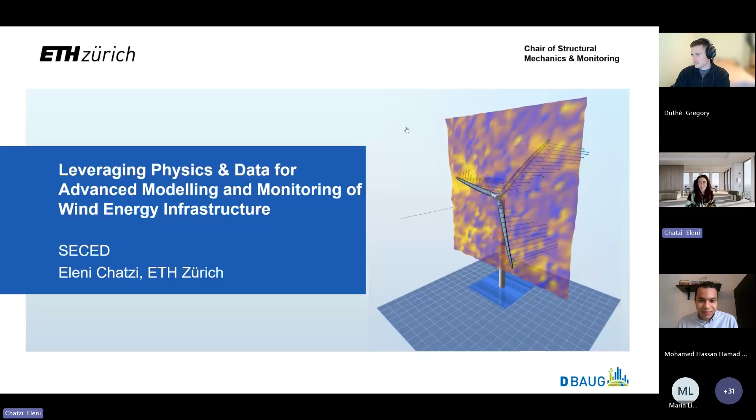I was saying that I very much like the format where you invite the different group members to offer some inputs. And for this, I would like to give an intro that is a bit broader than just wind energy structures. It's about our vision on monitoring and modeling different types of structures and infrastructure systems.

And maybe here to ask you if you can see the entire screen or the presentation mode, because now I don't know which one is shared. We can see the slides, just the presentation.

Good. Okay, great. So let me give you this kind of rough overview without taking too much time, which essentially lies in our view of infrastructures or large safety critical systems as cyber physical entities, which implies entities that integrate within them the aspects of sensing, computation, control, and networking, meaning that we do not just view the physical assets as sensitive structures that are exposed to threats from the environment, but we rather try to elevate these in a sort of hybrid representation, a sort of digital representation that is, however, active in that it offers a two-way communication between the physical asset and the processes and actions that we can, let's say, take upon this asset.

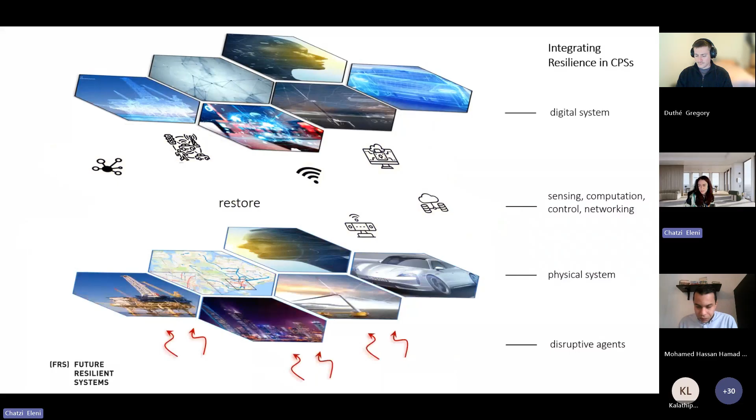So in order to make this kind of link, we rely on data, the availability of data that can be available in different types of forms. And today we know that such data can be extracted with various types of sensing technologies and at various scales, even from large-scale infrastructure systems, especially wind energy structures. And they can be extracted to offer information not only on the response of the system, which is typically what we try to seek through structural monitoring solutions of various types, but also on the loads that are acting upon this system and the environment within which it operates, which of course could be an environment that degrades slowly, something that is obvious with climatic actions, but also could be an environment that rapidly changes in the face of different types of extremes that could actually jeopardize the health and safety of these systems.

And gathering information throughout these operational cycles is very important for us, not only for effectuating different types of triggers for their repair and reaction, but also for modeling how these systems evolve and how we can actually improve them.

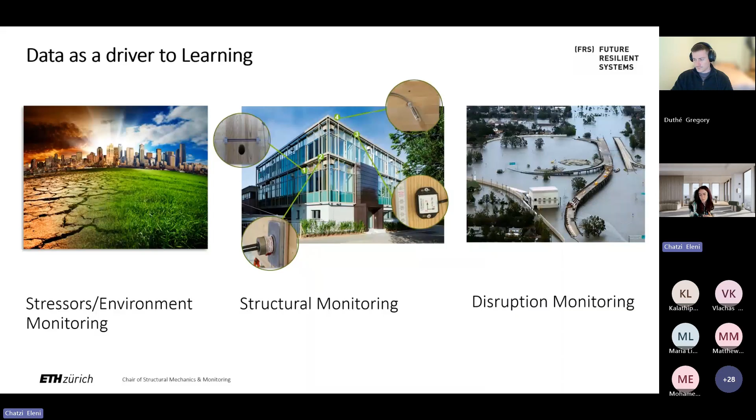And in the chair of structural mechanics and monitoring, we are in the, I guess, lucky position to have experience with different use cases, a bit beyond the domain of wind. Actually, wind is perhaps our largest domain of activities at this point in time. We even own a wind turbine structure not too far away from our lab, which we use as a living lab where we experiment with different types of sensing technologies and algorithms for structural monitoring.

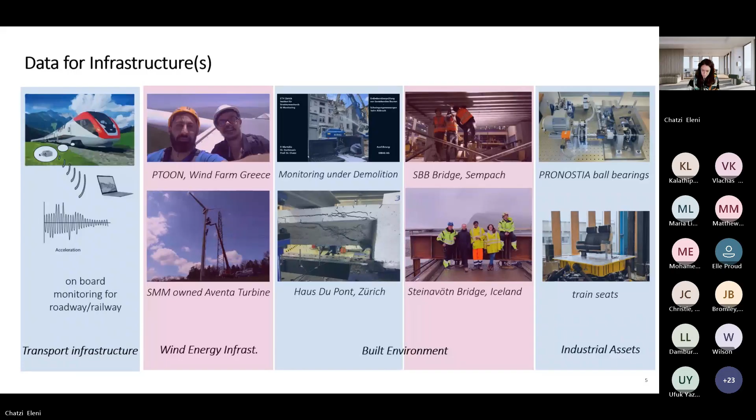But we're also lucky enough to gather experience from other systems, including railway monitoring, more conventional civil infrastructure, and even industrial assets. I say this because the methods that we use are actually inspired from problems and issues that are met throughout these systems. And it's interesting to note that some of the sensing technologies are also applicable more broadly.

But maybe to frame the approach that we follow, it's interesting to say what we can do with data alone. And wind energy infrastructure systems are good in this respect because they are data rich. So in fact, we are in the position to gather SCADA, as we call it, information from every wind turbine within a fleet, which is usually averaged information over 10-minute intervals, but still rather important information about the operational landscape within a farm.

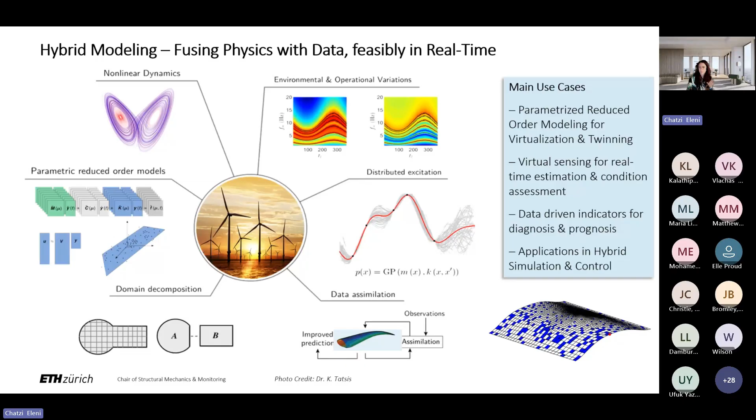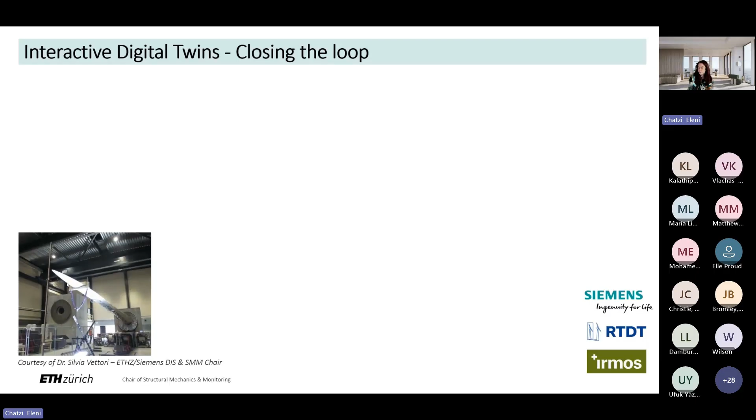I show you here such an application that was quite paramount for us. It comes from a previous PhD student of our group, Dr. Silvia Vettori, who was part of a larger European project, where the task was to try and deliver a digital twin of an actual operating blade. This was actually set up in controlled conditions in the lab, and you see here the blade, which was instrumented over its length with different types of vibration-based sensors, accelerometers and strain gauges, or tilt meters in this case.

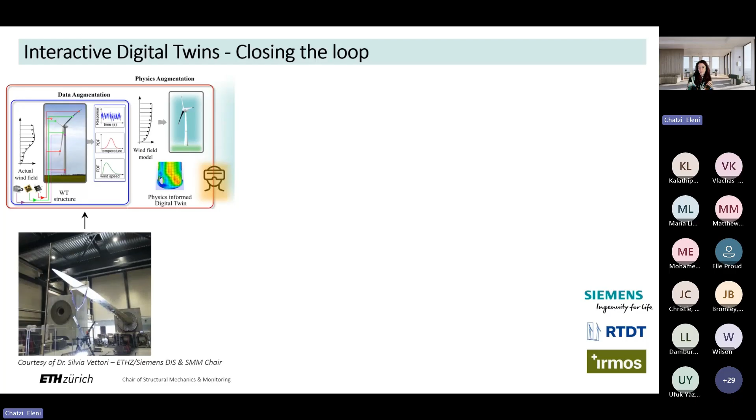And what Silvia did was to implement the logic that I described and that lies at the core of our strategy, which is to build a reduced order model based on physics, finite elements in this case, and substructuring methods for this blade, and to fuse it with the data that was drawn in real time at high sampling from the accelerometer and strain gauges, and then eventually blend them through a Bayesian logic of a Kalman filter, which operates in real time.

Now, what this outputs for you is actually the full field response of this structural system, the blade in this case. You can actually imagine to plot quantities of interest that include strain and stress throughout the surface of the system as it operates, or as it's being loaded in this case.

And our colleagues at Siemens Industry Software, where Silvia was based and currently still is based at, developed this sort of augmented reality platform that would deliver the output in a form that is easy for the engineers to interpret, not only for the obvious task, which is diagnostics, something going wrong with the system, but more importantly, once you have such a calibrated model, for forecasting tasks. So what happens when you have new and increased loads, for example, and how do we assess the reliability and robustness of the system under these loads?

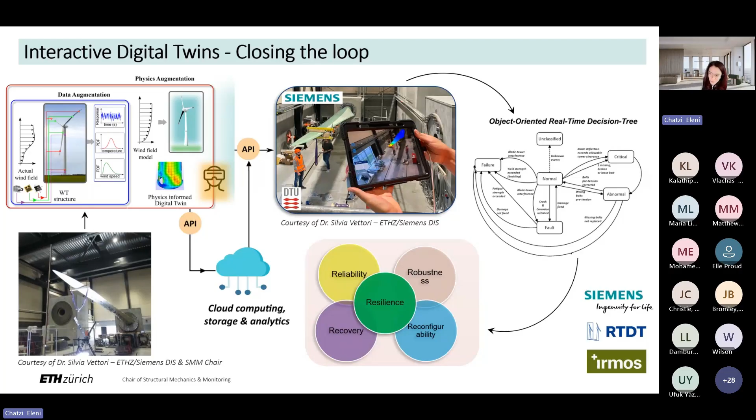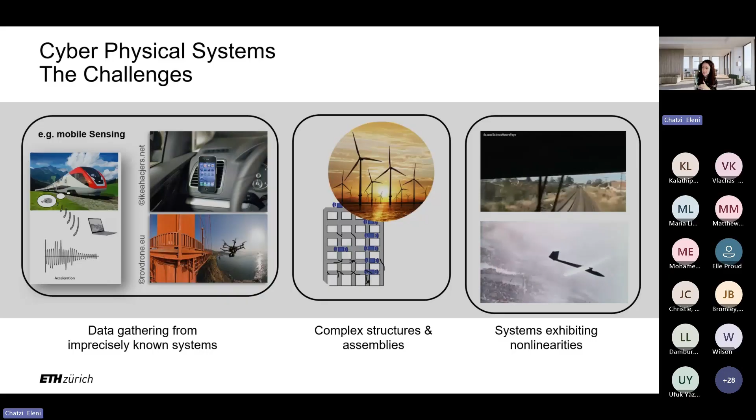This is actually what is underpinning our approach, and there are two spin-offs that actually came from our group that are trying to implement these concepts with RTDT implementing them in wind energy structures. There's one more thing I want to add, which probably will become apparent in what is presented next, which is what do you do with complex systems? And here our approach is to explain that it is not always enough to claim that we have the amount of physics at hand that is sufficient to describe the system.

Rather, we try to approach the problem as a two-axis problem where physics, on the one hand, represents how much knowledge or confidence we have in the first principles that underlie the problem, and then the data axis shows how much data is available. And there's a different scaling that you can do. And in a recent paper, we explain how different methods can be used in what we call this physics enhanced spectrum, to fuse physics and data at different weights.

A number of these methods exist, and as part of the group, we have been developing different subcategories of schemes that you can imagine can be used to fuse dynamics equations, for the most part, with a flow of data that is usually vibration-based data, and that can be characterized with different terms depending on how you imagine to fuse the physics into the problem at hand. So I invite you to also look into our further works.

I think this is a good introduction with respect to what you will see described next from the members of the group. Because I don't want to take much time, I'll just take you to the overall vision that we have, which is to exploit our engineering intuition and knowledge, which is something that we have always been using for what we engineers call design, which is the forward simulation, and now take it into consideration for what we would refer to as the inverse problem, the problem where observations, monitoring data, inspection data become valuable, and where even the knowledge of the expert can be exploited to guide operation, maintenance, and overall management of safety critical assets, and especially wind energy structures.

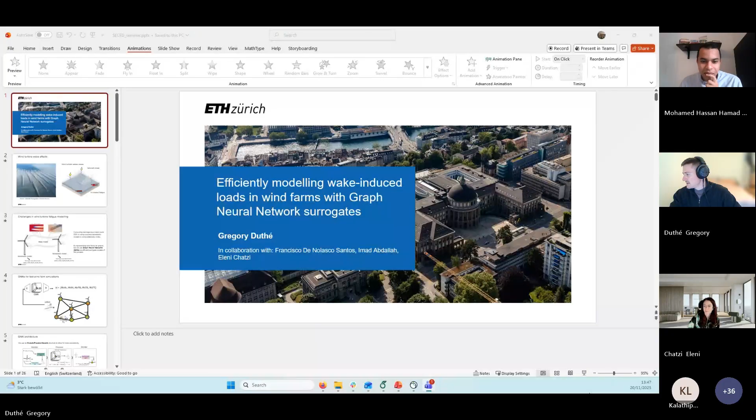I'm a postdoc now in the group working on wind energy in general, but mainly we're using geometric deep learning. And the work I'll be presenting here is some of the work I did during my PhD, which is about efficiently modeling wake-induced loads in wind farms using graph neural network-based surrogates.

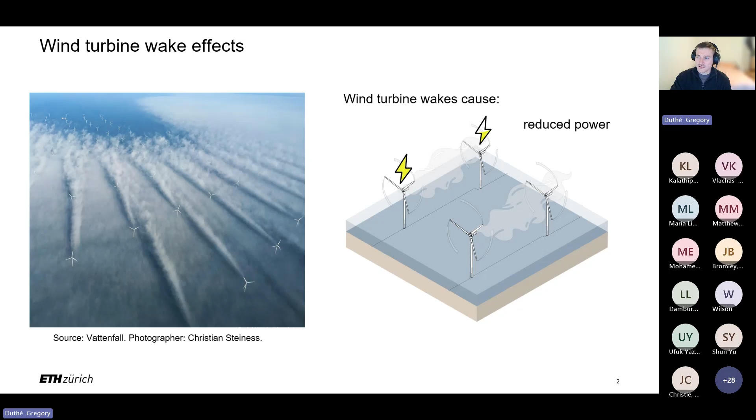So what is the big problem? Well, Eleni already briefly mentioned it. It's these wake effects. Front row turbines cause increased turbulence on the back row turbines, and obviously this comes with a cost. These back row turbines see reduced power, but something even more important and more difficult to model is the increase in fatigue that these back row turbines experience.

And how would one typically model this? It's quite a computationally intensive process where you start with multiple aeroelastic models. Typically in the wind turbine industry, we use OpenFAST, or HAWC2 is another aeroelastic modeling tool. And then we couple these aeroelastic models together using a wake model. Each aeroelastic model will compute the dynamic response of the turbine, and then through the wake model, we have multiple of these aeroelastic models coupled together. This is a computationally expensive process.

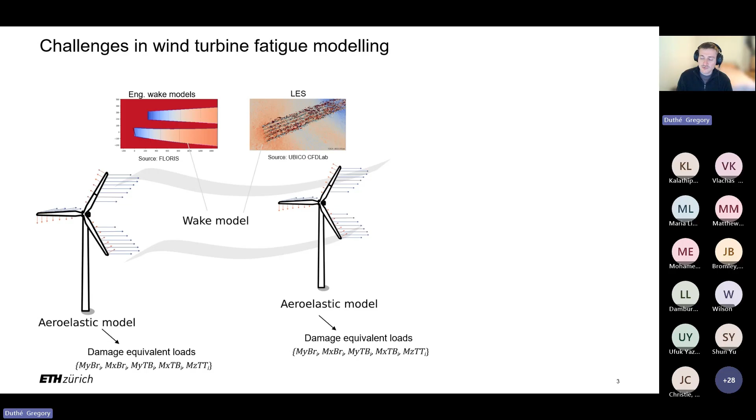From the aeroelastic models, we compute our damage equivalent loads, which are the quantities of interest. And even if we were to use the most simple wake model, such as just using Gaussians, like what is used in FLORIS, or something much more complex like LES, all of this is really expensive. So computing these damage equivalent loads using coupled aeroelastic models is very costly. We want to find an accelerated way to do this, and to do so, we use graph neural networks as an efficient surrogate model.

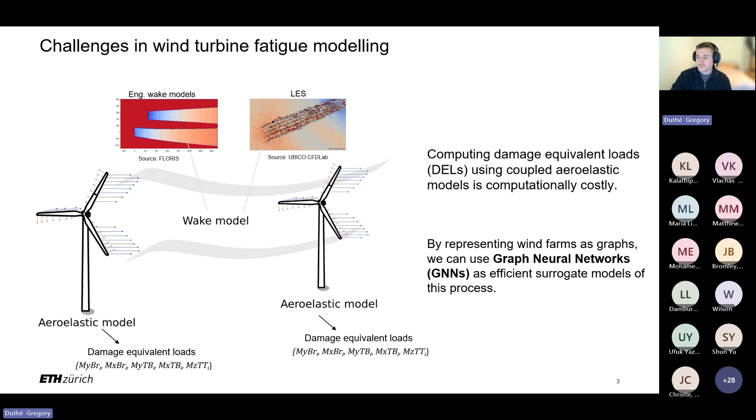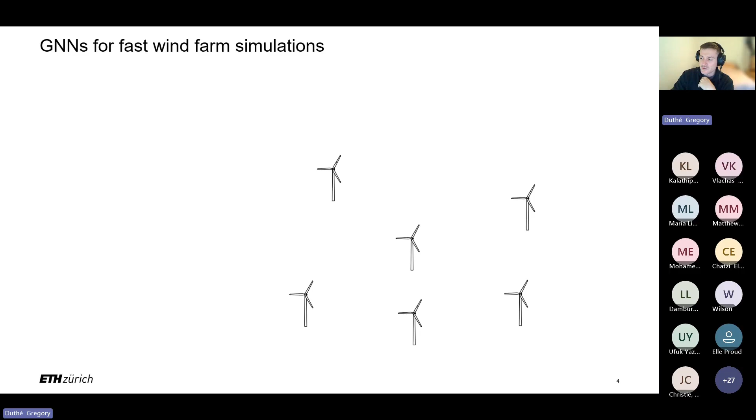So how does this GNN work? We start by taking our wind farm. Our turbines become the nodes of our graph. Once we have the nodes, we then need to connect them together using some kind of connectivity scheme. Often we use something like Delaunay triangulation to avoid having disconnected communities, but we could also go for a fully connected scheme. We then take some geometric properties that we append as edge features. And we have our global inflow condition, which is a graph level attribute as it affects all the turbines in the graph.

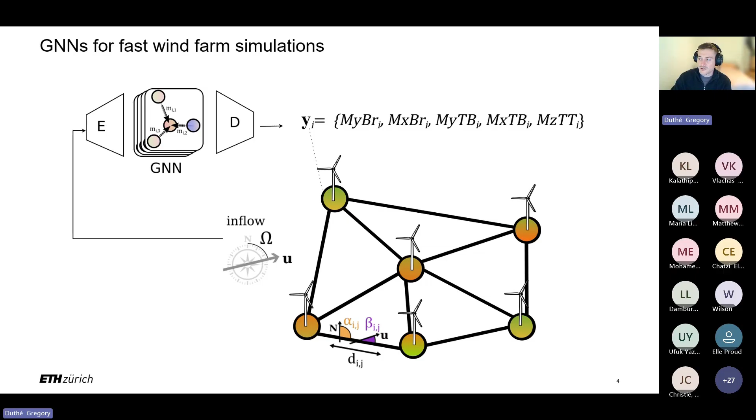We then take this graph with initially empty nodes and the edge features, as well as the global features, and feed them into our encode, process, decode GNN, after which we get updated node features, which are the quantities of interest, in this case, the damage equivalent loads for multiple components at each of the turbines. This encode, process, decode structure is quite typical in GNN applications for physics because it allows for much more expressivity.

The idea is we take the initial features and encode them, or project them, into a high dimensional latent space using simple MLPs. The processor is where the key step of the GNN happens. It's where we have message passing, where we transmit information from one node to the next. We first compute messages for each edge, which is connected by two nodes, and then we aggregate and update the nodes. By doing this iteratively, we can propagate information in our graph. After a sufficient amount of processing steps, we decode back into the physical space using, again, MLPs.

Now, the training strategy we use in this work is to first create a very generalist GNN by pre-training it on thousands of random layouts that we generate using a cheap simulation tool called PyWake. With this generalist GNN, we want to learn the fundamental physics of the problem. Then, if we have access to higher fidelity data, we can adapt and fine-tune this generalist GNN to this higher fidelity data, or for a given layout, using efficient fine-tuning. In this case, we use low-rank adaptation.

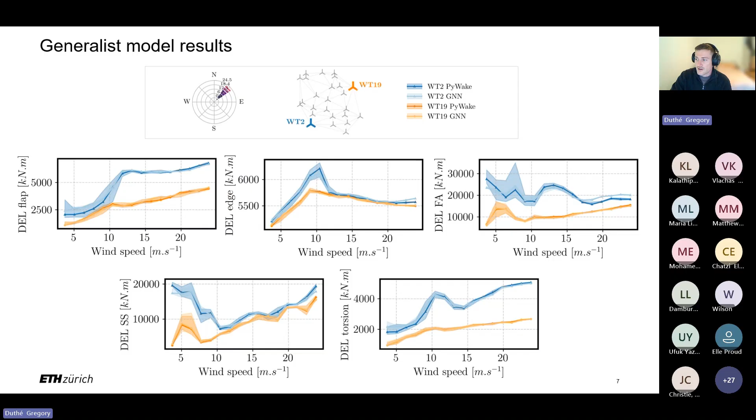The last extension that I briefly want to mention in this work is going in the direction of uncertainty estimation. So we don't want to completely change the model, and we would like to get some estimates of how the model is behaving with regards to uncertainty. So what we use is conformal predictors, where we basically reserve some calibration data to determine guaranteed prediction intervals without strong assumptions on the model.

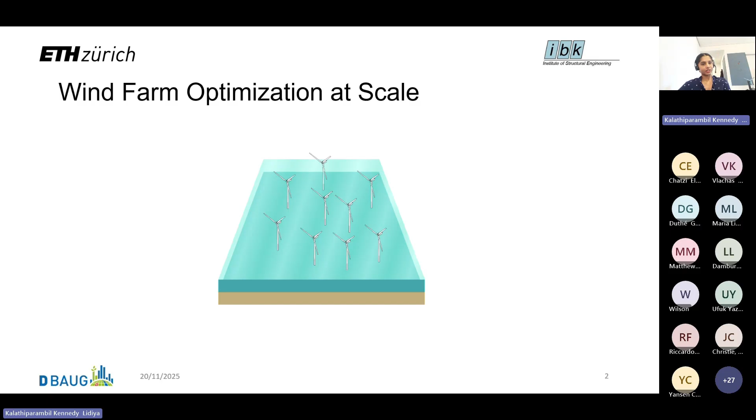So from what Eleni and Greg had already explained, we all now understand these are complex aging infrastructures that are subjected to various physical processes happening at different scales. And this is often not great for the turbine. So in the last few decades of research, there has been an increased attempt to reduce the levelized cost of energy, which was driven by scaling up the size of the turbines. But unfortunately, we have reached a limit in scaling up the size of these turbines.

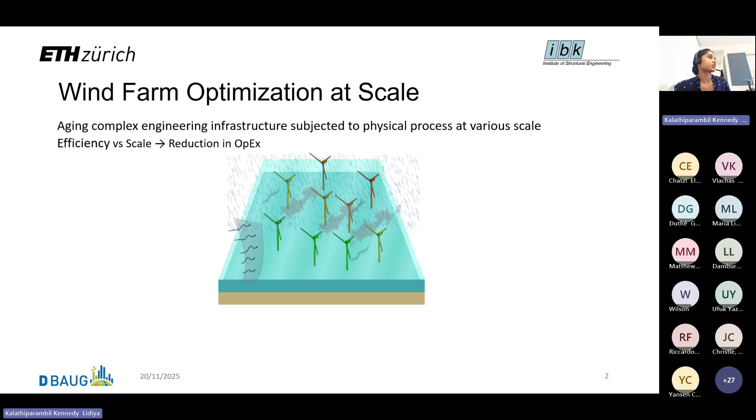So then came the question of efficiency versus scale. So it looks like we could also reduce the levelized cost of energy by making the operations and maintenance much more efficient. But this comes with a lot of challenges. We need to understand the interactions at an entire farm scale, which is very hard to model, as Greg explained.

And the topology becomes much more important, that we need models and computational frameworks that can work across different topologies and different sizes of farms. So this is my main research, where I want to build a computation framework for more generalized

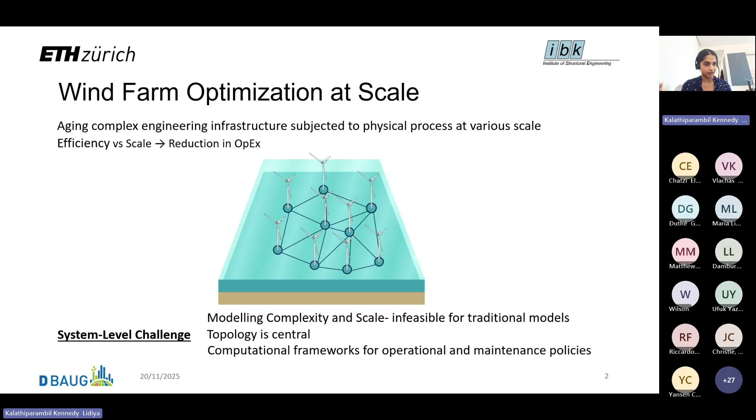support for maintenance decisions. So there are three main research questions that need to be answered to build this computation framework. One is, what is a good model from which we can accurately infer what is happening at farm level, and also it is fast enough that we can make inferences for the reinforcement learning agent to make or suggest actions or policies.

And what is a good generalizable surrogate model for this? So this is what Greg has already explained, and I'm building upon what he has done for farm level modeling. And how can we best make use of the expert knowledge or domain knowledge that has been accumulated over years to make the reinforcement learning agents make better policies or decisions, or suggest better policies or decisions?

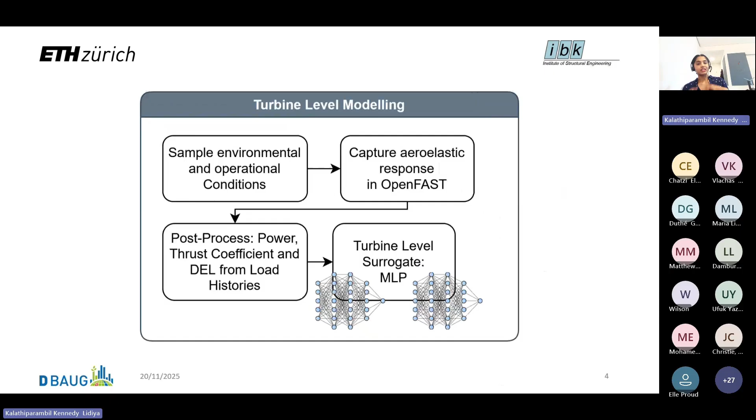So this is the entire framework I'm trying to build. This looks a bit complicated at once, but I will walk through one by one. So first, we need to understand the turbine level physics, what is happening at the turbine level. So we have these aeroelastic models using OpenFAST, where we sample different inflow conditions and understand the response of the turbine. And from the load histories, we can understand what is the load on each turbine.

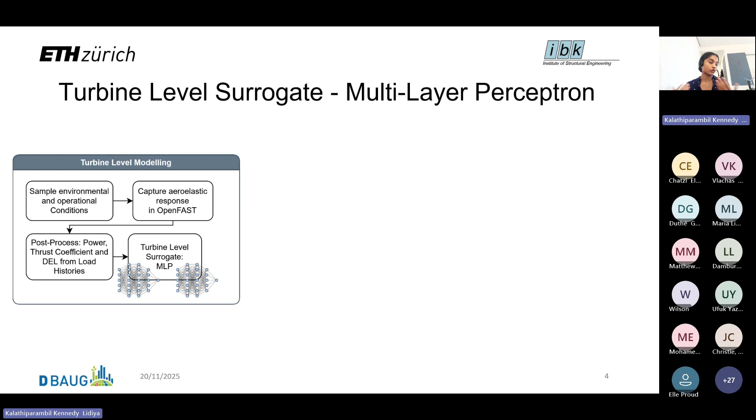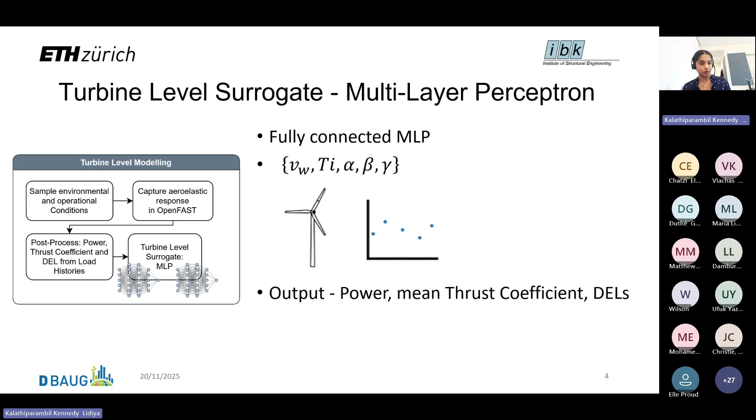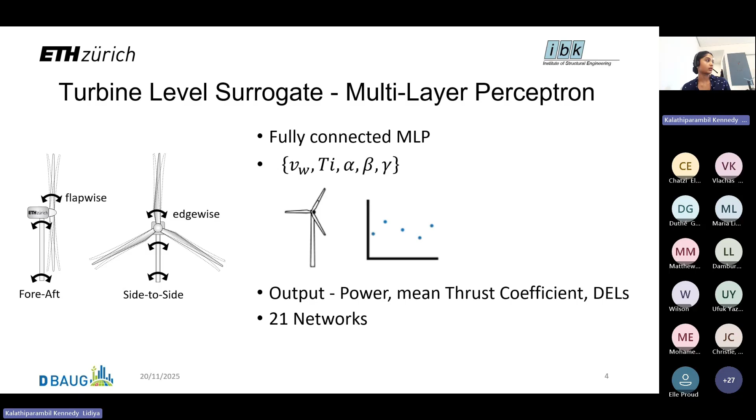And such generated data set is used to train a surrogate, normal multi-layer perceptrons, to give quantities of interest, in our case power, thrust coefficient, and damage equivalent loads at different components, where currently we are focusing on blade flap-wise, edge-wise, tower bottom side-to-side, tower bottom fore-aft, and also tower top yaw.

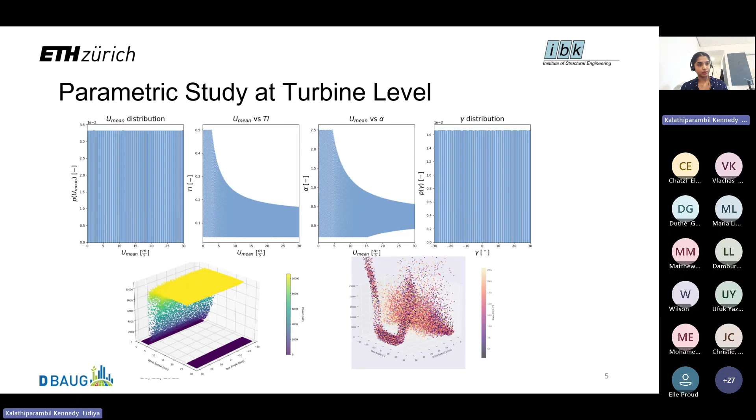So this is how the inflow conditions were sampled. It is based on some literature, and you can see we could simulate around 65,000 different cases, and the surrogate model for predicting load and power was built based on this.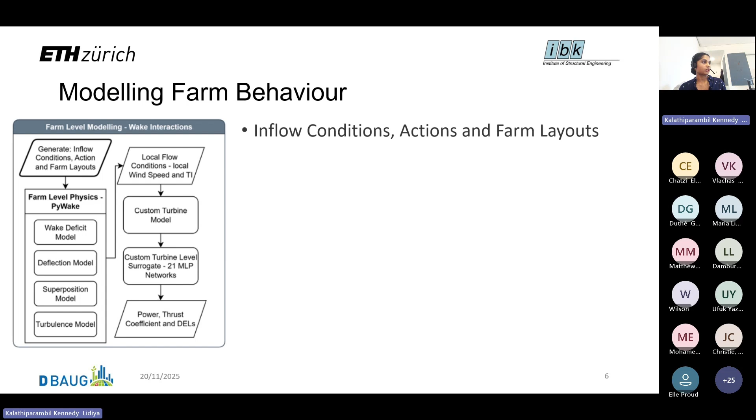And the next main part of the framework is to understand the complex wake effect across the farm. So we generated different layouts of wind farms, and for different inflow conditions and actions, which would be in our case yaw and pitch angles, what would be the local inflow, local wind speed and turbulence intensity, and based on this turbulence intensity, what would be the power, thrust coefficient, and damage equivalent loads at different components.

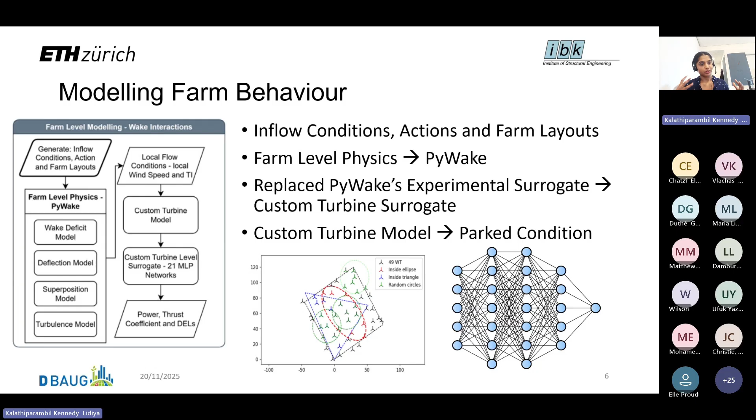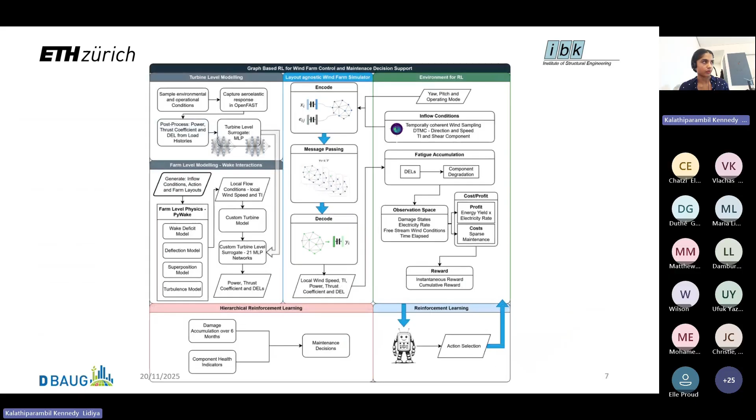So now we have a model that would give us the wake affected power and damage equivalent loads across different farms, different layouts, and different sizes of farms. Then this generated data set is used to train the graph neural network, which is similar to what Greg did, where nodes represent turbines and edges represent the spatial attributes.

And the input features are encoded to a higher dimensional latent space, where a sequence of graph convolutions aggregate and propagate information across the graph to understand the turbine level interactions. And this is then decoded to the physical space.

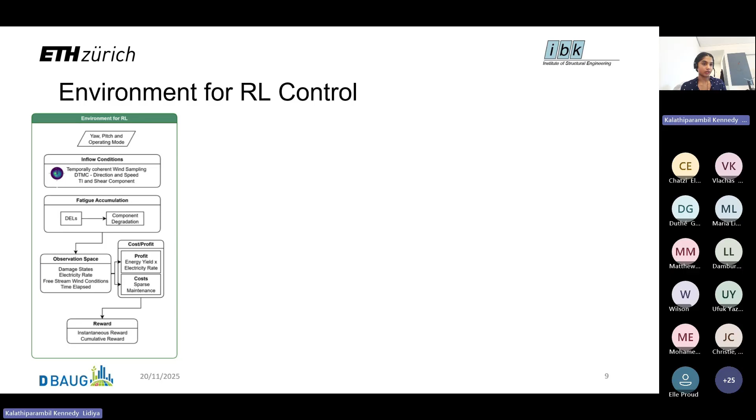So now we have a forward model from which we can understand what would be the consequences of different actions, such as yaw and pitch angles, on the power and load on the turbines. We can use this as a base for building a simulation environment for the reinforcement learning agent, which could give us policies or actions for controlling the farm.

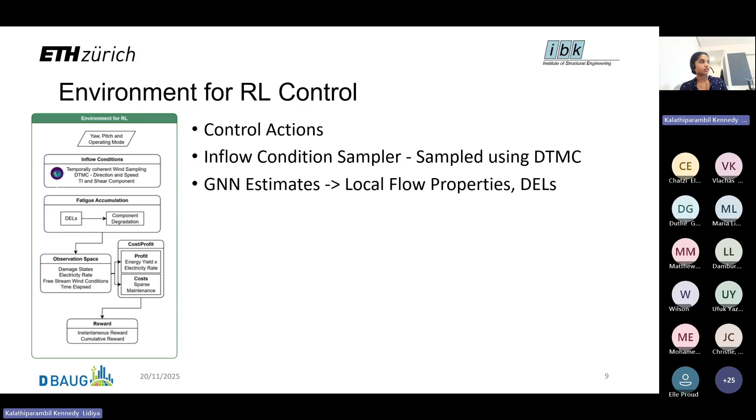So the control actions are sampled, as I already mentioned, and the consequences of these control actions can be estimated using graph neural networks. And using the Palmgren-Miner rule, we can calculate the damage accumulated over 10-minute intervals, and this will form the core of the observation space, which is embedded to a graph.

And the cost and profit of these at each time step can be computed using a dense or sparse model, where dense cost means that the replacement cost, if a turbine is broken down, is spread across the entire operating lifetime of the turbine, whereas sparse cost is like pay per breakdown logic, where cost is incurred only when a component breaks down or a component is replaced.

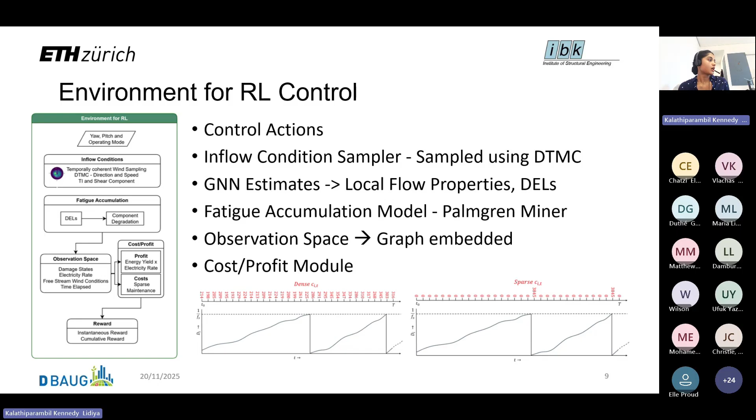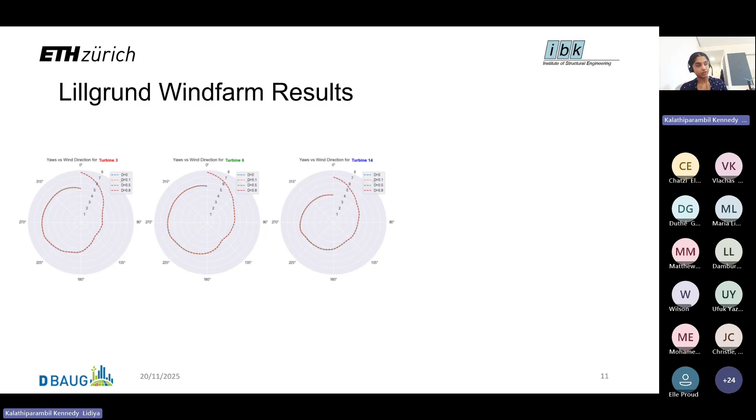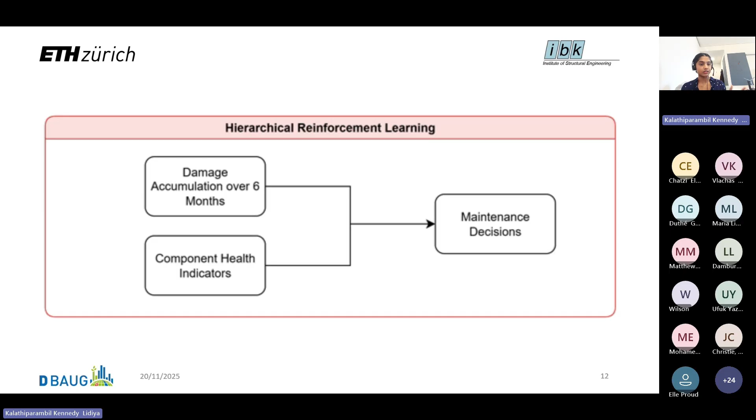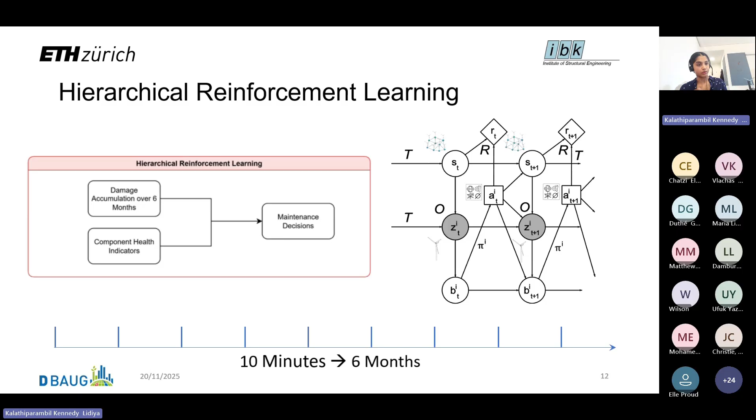And finally, the idea is to extend this to whether, from the damage equivalent loads that are calculated over 6 months, we can make some quality health indicators about the health of different components at the farm level, and suggest maintenance actions. And since we cannot fully observe the state of the farm and different components, we would like to cast this as a POMDP problem, where we assume partial observability.

And the main objective of the framework is also to understand the best way to encode expert knowledge into the framework. This could be in the form of collecting information regarding, for different scenarios, what actions experts or people in the domain would take under these circumstances, or having some limits in terms of logical expressions that would prevent certain actions from being taken under certain conditions, or to have intermediate rewards and penalty functions that guide the agent towards some desired behavior. And that's it.

And I will give the floor to Kostas now. Thank you very much. Thanks, Lidiya. I will also share my screen, change a bit the gear.

I'm Konstantinos Vlachas, Kostas for short, a researcher with Professor Chatzi at IBK. And I'm going to focus on what we call here as adaptive twinning for the purpose of optimizing downstream tasks such as structural health monitoring, operational maintenance, and so on. I know that twinning is a keyword for most of us, but what we would like to emphasize here is this virtual representation of a physical system on the right. The two communicate, of course, through sensing data and information. And there is also this modeling part that makes sure that this virtual component, this twin, hybrid twin nowadays because we also use observational data, is an accurate representation of reality that can be used for control, decision making, and so on.

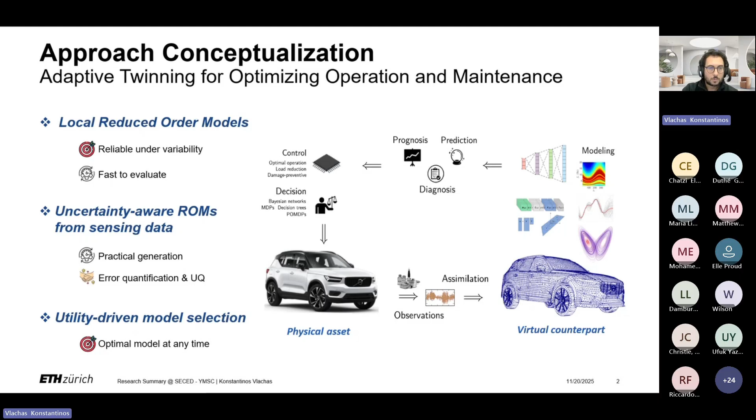So we are going to, in real time, judge and evaluate what value every model that we have available brings for the downstream task, and show a framework that gives you the optimal model at any given time. So let me start with the local reduced order modeling part.

This is an assembly that is based on two different components. On the first, we have physics-based reduced order models. This is a combination, if I may, of purely projection-based techniques, so purely equation-based and physics-based techniques, coupled with an additional projectional level.

The idea here is to use a machine learning scheme to be able to infer, to generate models conditioned on sensing data. So W is the sensing data, and essentially this variational autoencoder learns a space, what we call here the space of models. It learns a space where you can interpolate instead of the original parameter domain.

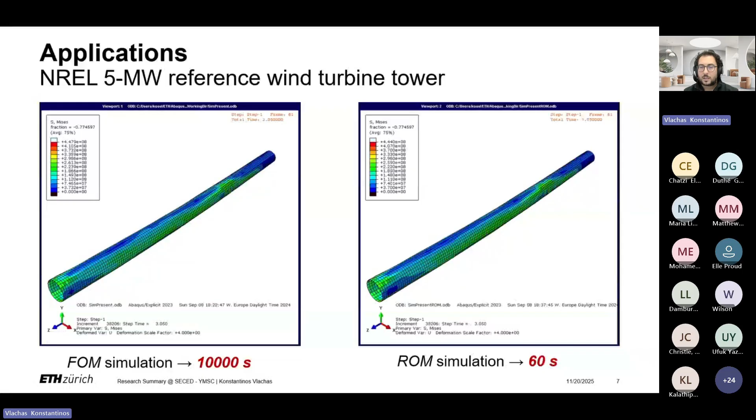And on the right, you can see how precisely, how accurately the reduced order model can capture the stresses in this case, even in this extreme instance of plasticity. And the note here is that we can do this in 60 seconds, whereas the original full order simulation takes 10,000 seconds to evaluate. And you can see the fidelity, both locally, capturing local stress intensity, and in the global picture of the results. So this is the idea, to be reliable and fast.

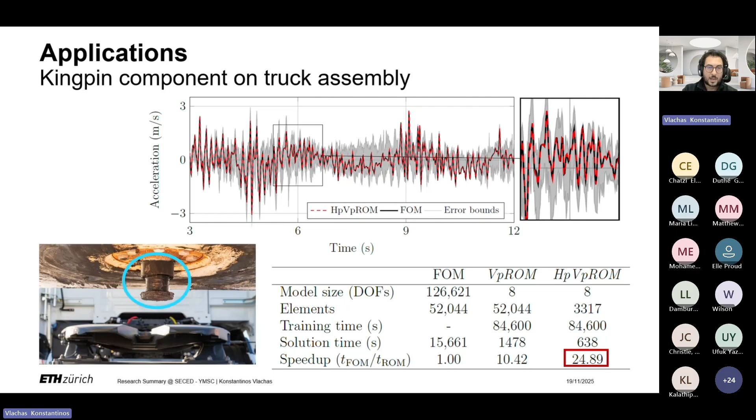This is the concept. And we have also exemplified this reduced order modeling component in local regions, very localized components, as in this truck here. It has a kingpin. This kingpin is the component that couples the two parts of the truck and exhibits all accelerations, braking, all vibration phenomena. And you can see again how accurate the reduced order model is, 25 times faster than the original finite element simulation.

Now, we have also demonstrated this in an inverse problem of crack detection. This is an aerospace panel, and you will see in the middle a sequential filter powered by ROMs. So in the core of the filter, you have ROMs, and it will almost immediately identify the region of the crack. This is a crack here, and after a while, it will also capture the exact crack. I think you caught it, it almost immediately identifies the region. So the population is currently in the region of the crack.

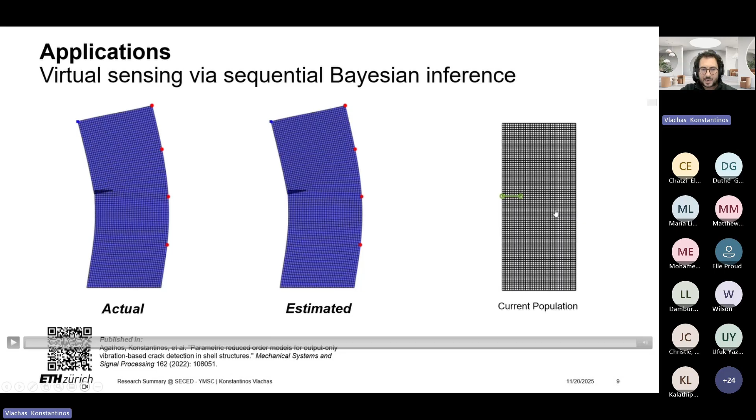And after a while, by matching the incoming data through a filter with the ROM simulator, a parametric ROM simulator, it can give you the exact crack that this panel has in terms of damage. So this is the idea: coupling through a filter paradigm the incoming measurements with a fast forward simulator, and by a proper objective function, identifying the damage, the crack in this case, and so on.

Now, let me get to the last portion of the talk, the one that talks about this utility-driven model selection I mentioned. The concept here is that, as you see, we have a continuous monitoring. So this happens again and again in a continuous manner. And the goal is, on the other end, to obtain the optimal model at any given time.

Why the optimal? Because it might be that you have, first of all, parametric models. So we strive for our models to be as parametric as possible, as generic as possible, to be able to capture different phenomena, nonlinearities, damage, and so on. But at the same time, you might have costly models that are very accurate or very fast models that are not that accurate. And the goal is to obtain the optimal model at any given time.

And we do this by solving a utility maximization problem. So we try to balance the value every model brings by being accurate and the value it brings by being efficient. This is the idea. And you have these two competing attributes that you need to balance via Bayesian decision theory. And you can see, of course, in terms of accuracy, overestimation or underestimation of certain response indexes can be penalized differently.

And this leads to a continuous evaluation of the utility, a continuous evaluation of what value every model brings to the table. And of course, for every single instance, you can get the optimal model to obtain the optimal response and the respective error bounds.

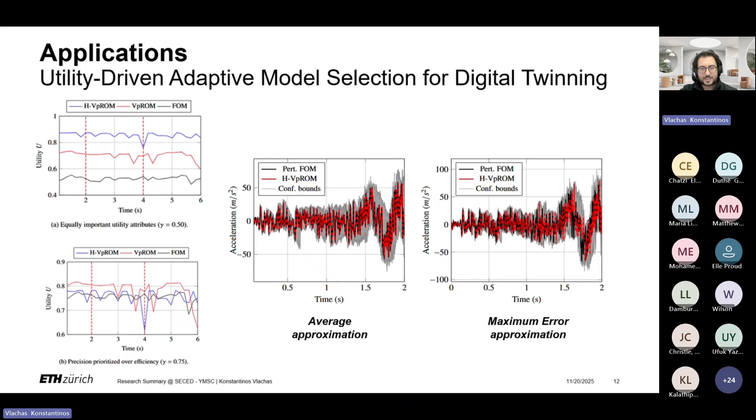And you can see that even in the worst case scenario on the right, where you have the approximated response, the red one, being not that accurate compared to the black one, due to noise, perturbation, and so on, the error bounds that are suitably computed can capture the actual response and still give you an idea of what is happening, even though your average approximation is not perfectly accurate. And again, the idea here is to always have this optimal model. Even if something happens, it will give you the slower but accurate model to continue.

So this concludes my talk. As I said, the topic was on deriving these virtual twins, or hybrid twins if you prefer, because they are also coupled with monitoring data, and using them in a utility-driven framework to always obtain at any time the optimal model that can help you for condition monitoring, decision-making, or any application you might have in mind.